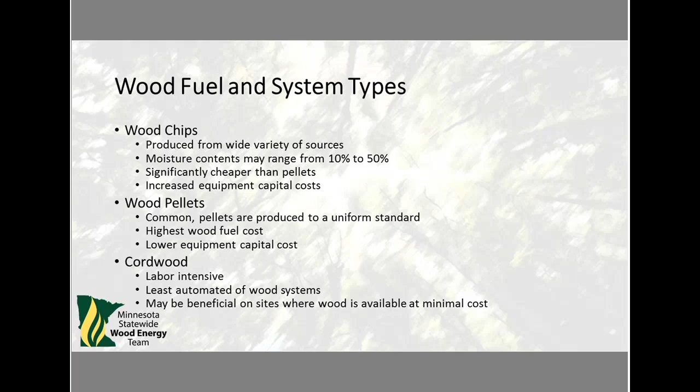So modern biomass boiler systems will use a staged combustion process in which the wood is first dried of any remaining moisture content, and then gasified, and then the wood gases are completely combusted. This process is a very efficient process and essentially converts all energy locked in the wood to heat.

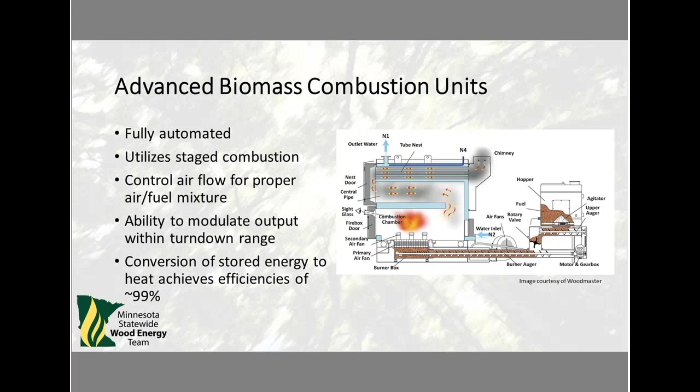Combustion air in these systems is usually controlled by variable speed drives on the fans, and maintains proper air to fuel mixtures, which maintain good efficiency and low emissions of the systems. With the installation of just about any biomass boiler, hot water boiler at least, thermal storage is always recommended, especially if it's going to be used for space heating where the heating demand will fluctuate.

Thermal storage is essentially storing of heat in the form of hot water at elevated temperatures, usually above that at which it will be used. It's a very, very key, I want to stress that, it's a very key component for systems in which heating demands fluctuate considerably, like poultry barns.

Thermal storage provides an immediate response to fluctuating demand, while it provides a more uniform load on the boiler unit itself, which improves efficiency. Thermal storage also provides an outlet for heat during low demand periods. When heating demands are low or non-existent, the residual heat in the boiler has somewhere to go.

The storage of heat above distribution temperatures kind of maximizes the heat storage capacity of the thermal storage tank and allows the system to meet short-term peak demands above the rated capacity of the boiler. You get more bang for your buck.

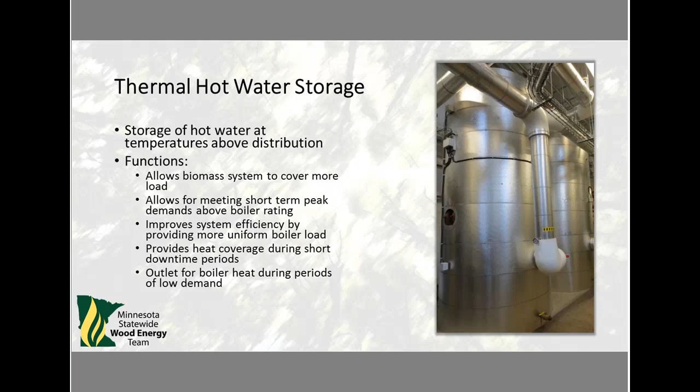Wood storage and handling. The most common delivery method for wood is going to be walking floor trailers, which are very, very common in the poultry industry for delivering animal bedding and things like that. Bulk storage of wood chips, your storage bunker, so to speak, should be sized such that it can accept a full delivery of wood from a walking floor trailer, from a full 50-foot trailer, with additional capacity available to keep the system running while a delivery is scheduled. Trucking is a very significant cost to the delivered price of wood, and the ability to accept full loads is crucial in getting competitive pricing.

Handling systems can range from small day bins, which would be loaded by a tractor or a front end loader from a bulk storage area, up to fully automated storage systems which use a live floor or some method of reclaim to transfer wood from the bulk storage area to the boiler. Fully automated systems, of course, do add capital costs to the project.

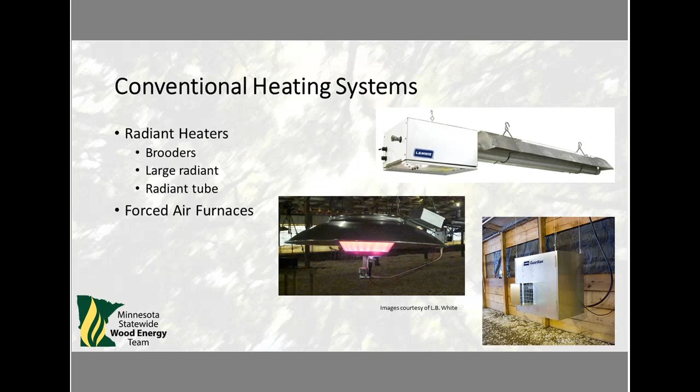Hydronic heating equipment, on the other hand, is what would be served by a hot water boiler. It requires a heating source, such as a boiler, which could be either propane or fossil fuel or biomass. Hot water is circulated throughout the barn for heating and requires a heat emitter to transfer that heat from the hot water to the barn. Fan coil units are the most common, and they are essentially just a hot water coil with a fan blowing air over it to heat the barn.

There are models of fan coil units specifically designed for poultry barns, and design considerations for poultry farms really are mostly due to dust. That's the main design consideration. They're designed to be robust to handle several cleanings of dust off the tubes and the fan blades.

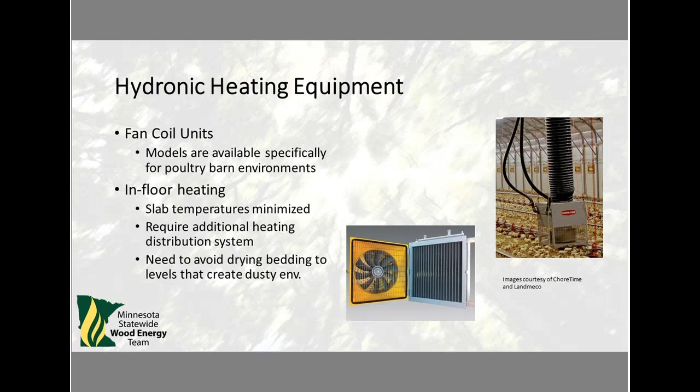In-floor heating systems are another form of hydronic heating, in which hot water is piped through the slab. These systems aren't necessarily common for poultry barns, though; installation costs tend to be very high, and an additional heating system is going to be required anyway, because you can't get all your heat from the floor. The bedding provides some insulating factor, and you can't have floor temperatures elevated such that it would provide an uncomfortable environment for the birds.

Boiler plant location is key in the layout of these systems to minimize piping runs, which can make up a significant cost to the installation of such a system. And then consideration must also be given to delivery vehicle access. How is the wood going to be delivered to the boiler plant?

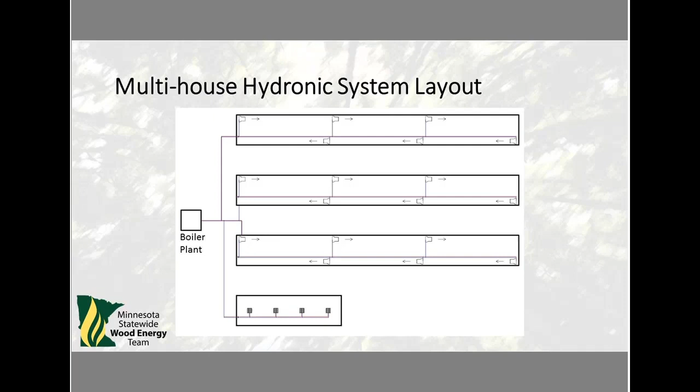For periods in which demand might exceed the biomass system capacity, it's always recommended to have a backup boiler and a boiler for peak demands to provide additional heat. Or the alternative is to use multiple biomass boilers that can be staged. A peaking boiler, in this case a propane boiler, would be operated to provide heat to the system should the biomass system not be able to maintain the set point temperature. A propane boiler backup also provides redundancy should the biomass boiler system be offline for any reason.

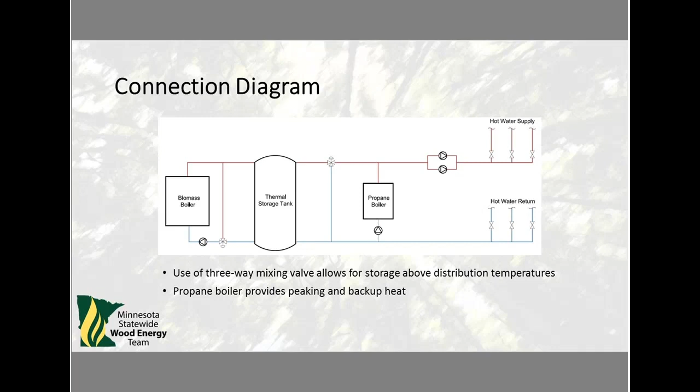A quick note on boiler sizing. Biomass systems generally should not be sized to meet peak loads, at least with a single unit, but rather to cover as much load as possible. I mean, the primary goal is displacing as much propane and higher fuel cost energy. So they should be sized to offset as much load as possible.

These systems typically have a turn down of 4:1 or down to 25% of the rated capacity, and performance can suffer at the lower firing rates because of the relatively large thermal mass of the unit and longer combustion times for solid fuels, relative to gas. Response is slower.

A properly sized system would displace 80 to 90% of existing fuel use. 100% fuel use can be offset through the use of multiple boilers as well, multiple biomass boilers.

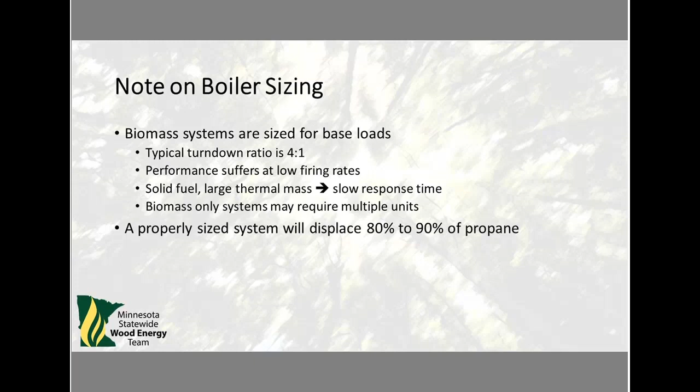So the capital costs for installing a biomass system such as we've discussed so far are made up of a handful of items. The type and size of boiler is going to play a large role. The larger boilers will increase cost, which is another reason for avoiding oversizing boilers. And then optional features like auto ignition, auto cleaning, auto blowing out of the boiler tubes, auto de-ashing also can add cost to the system.

Thermal storage tanks can be a significant cost, particularly if it's a pressure-rated tank. Heat distribution systems for a district system, for a system that serves multiple buildings, is going to be very significant in terms of underground piping, pumping costs, all valves and all the heat emitters that are required.

A fuel storage and handling system is needed, and the degree to which the system's automated is going to increase costs of a system. It's most likely, especially for a poultry farm, that a new building is going to have to be constructed to house the boiler system and the wood storage, which is a significant cost, and then an access for delivery vehicles must also be considered.

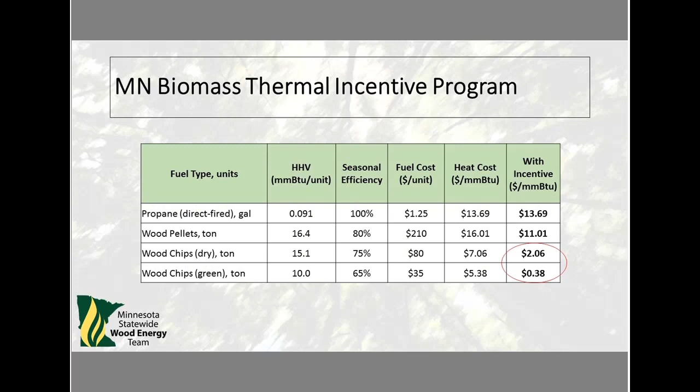So let's look at a theoretical poultry farm as an example. This farm described here uses about 50,000 gallons of propane a year for heating its barns, and this would be in the ballpark for a farm with 3 or 4 turkey barns. Assuming an energy cost of $1.25 for propane and $80 a ton for wood, it might look something like this. Existing fuel costs, $62,000 with a propane system, and then about $35,000 for a wood system.

That would provide savings of about $27,000 per year, which at current prices, payback on this type of system, you know, is still over 30 years. However, that's heavily dependent on the projected energy costs. This example shown would achieve a 10-year payback with propane in the area of $2.20 a gallon.

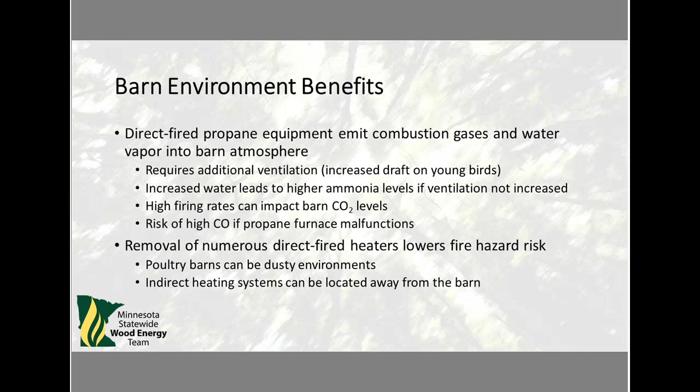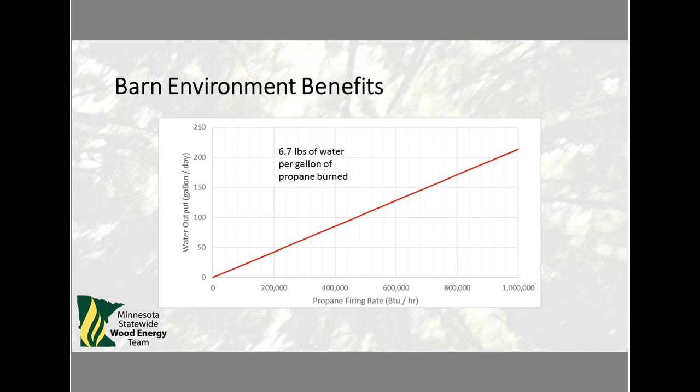The improvements to barn environment and bird health primarily are less ammonia formation. This would be expected to improve bird performance in terms of reduced mortality, improved feed conversion, shorter grow-out period. In addition, less fan energy is required to ventilate the barn, and lower ventilation rates may be used, which further reduces the heating demand for the system. Some of these factors are difficult to quantify in terms of an economic analysis, but they're provided by a biomass system nonetheless.

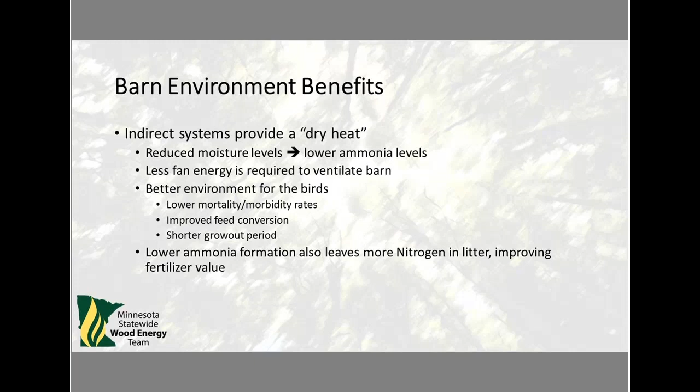So some other general benefits for using wood energy in the state of Minnesota are your dollars are going to be kept within the local economy. It's going to help the trucker or the logger as opposed to being sent out of state or even out of country. Having biomass heating equipment and propane equipment on site gives you a diversification in your fuel options and can help protect your operating costs from volatility in the oil or gas market.

Carbon footprint of your facility is going to be reduced with biomass heating. It's a renewable energy form, renewable, sustainable. And then utilizing low-value residual wood strengthens the market for that wood, which provides an outlet for forest management practices, helps combat soil erosion, wildfire, that sort of thing. So those are the benefits of a biomass system.